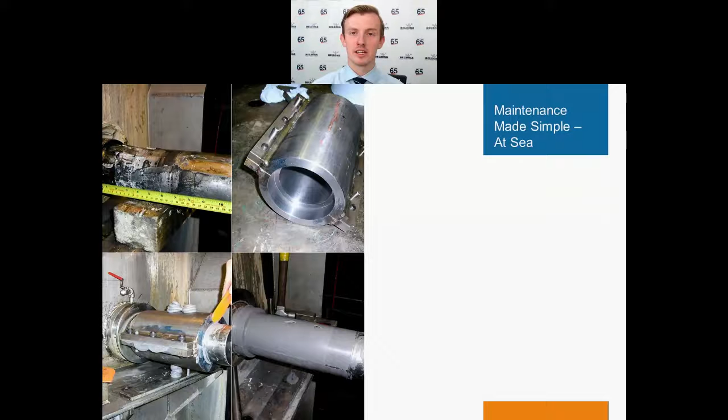One common application, as previously mentioned, is rebuilding and repairing mechanical equipment using forming techniques. Repairing worn shafts can be very tricky at sea, as it normally requires disassembly of equipment and removal of the shaft, usually for workshop repair, where you'd most often see a welding and machining back technique. The Belzona paste grade materials are 100% solids and do not change shape during curing. Therefore, they can be used to rebuild components to fine tolerances using pre-made formers. This allows for quick and easy application and can be done in situ without disassembling equipment, making this technique perfect for at-sea repairs.

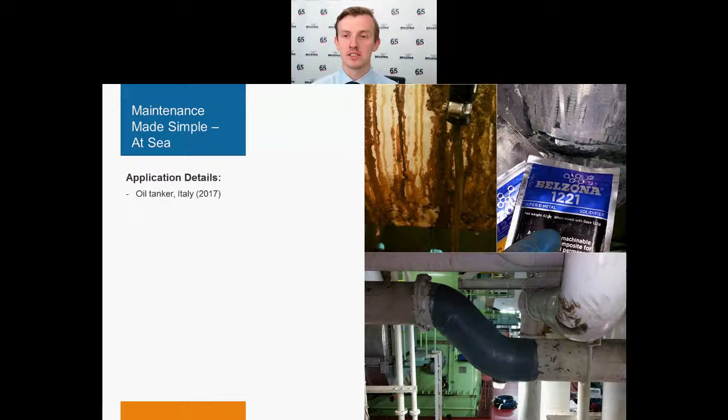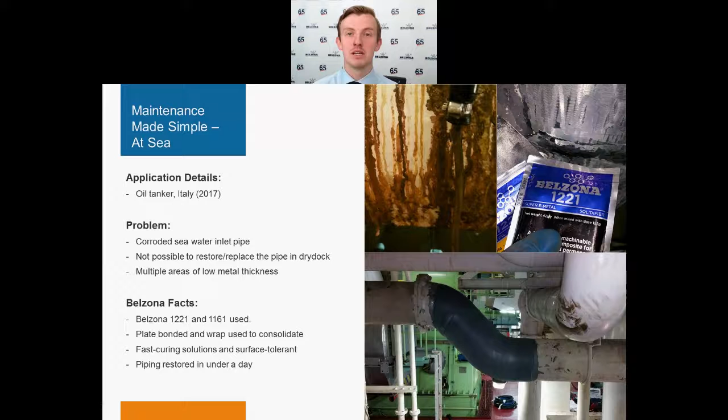Another common problem is leaking pipework, which presents unique challenges in the at-sea environment. Due to restricted space and limited availability of equipment, it's often not possible to carry out thorough surface preparation. Coupled with often wet and oily conditions, carrying out repairs can be quite difficult. In this case, the leaking pipeline was part of a cooling system, so the ship was unable to operate at full capacity until the leak was fixed. By utilising Belzona's fast-curing repair materials, the leak was arrested in less than 1 hour as a temporary measure. The repair was then overwrapped with Belzona's surface-tolerant materials, creating a strong and long-lasting repair with minimal surface preparation, directly onto a water-contaminated surface.

Touching a little further on surface tolerant materials, we're now going to show a short video of one of our emergency repair materials. As mentioned, in that case study it was Belzona 1161 in particular, but one of the most versatile materials we have available is Belzona 1212. We're going to share a short video with you now—I'm just going to stop sharing the screen and start the video. Just bear in mind it could be quite loud, so you might want to adjust your headphones accordingly for the start of that.

Belzona 1212 is the latest in rapid cure and adhesive technology for your leak repair and sealing needs. It is easy to use with a 1-to-1 volume mix ratio, and it can be applied with regular tools and minimal training. Once prepared, Belzona 1212 is incredibly surface tolerant, giving it the ability to bond with surfaces contaminated by oil or moisture. It can even be applied to underwater surfaces.

With Belzona 1212, many of our clients are quite surprised and amazed with the success when it comes to bonding our product to oily or contaminated surfaces. That, combined with the quick return to service, certainly creates some smiles on faces. Belzona 1212 maintains integrity with incredible adhesive strength.

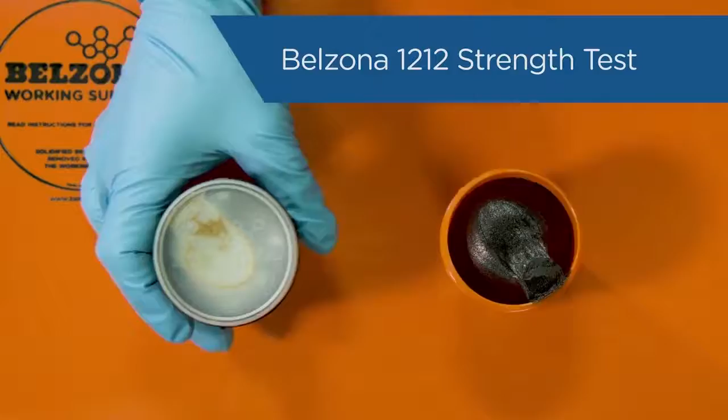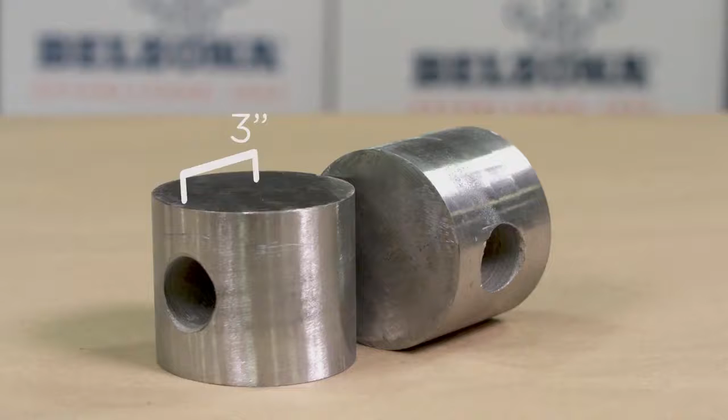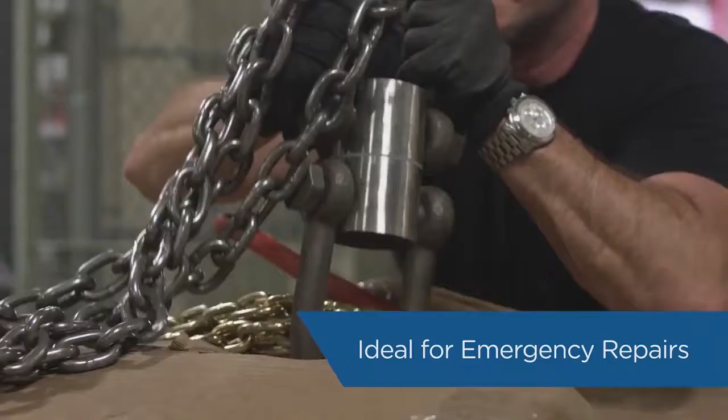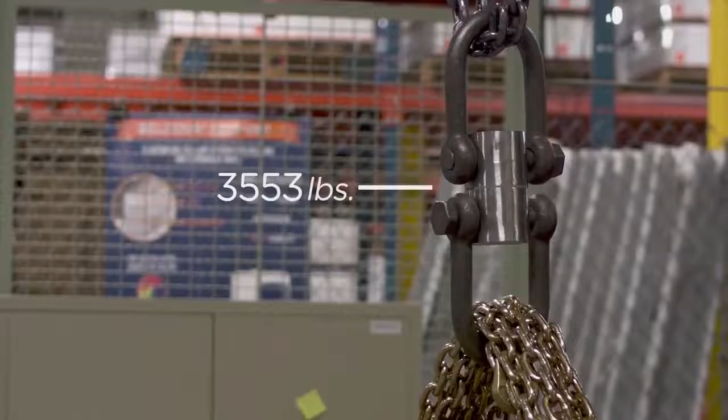Let's put it to the test with 2 tons of chain. These 3-inch steel cylinders are covered in hydraulic fluid. Belzona 1212 is directly applied, and both sides are bonded to each other. Belzona 1212 cures rapidly, capable of light loading in as little as 90 minutes, and full mechanical strength in 150 minutes. This makes it ideal for emergency repairs when you can't afford excess downtime. Will 2 tons be too much for this bond? The bond holds easily.

Belzona 1212 is a cost-effective, long-lasting solution for everything from leaking pipes and transformers to damaged ship hulls in underwater structures. With lots of great features and benefits, it benefits pretty much every industry.

Of course, some of the other products we've mentioned during the case study section also share these characteristics. 1221 has the fast curing ability, and 1161 has the surface tolerance as well. So you can be safe in the knowledge that an easy to apply, safe solution is available at your fingertips. I'll now hand you back over to Tom as we move off the ocean and then to our dry dock to look at the type of maintenance that can be required.

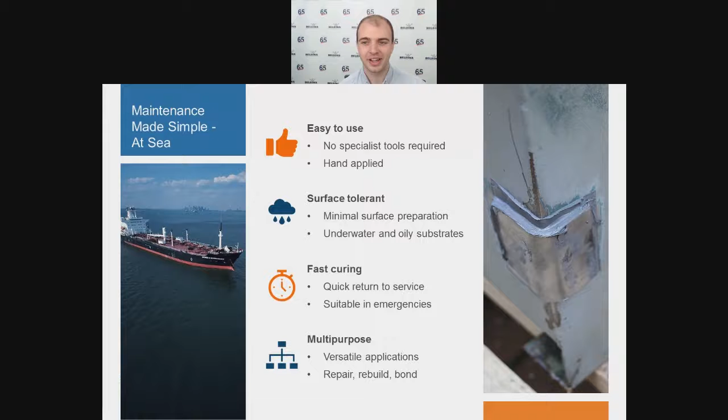As mentioned, we'll now take a step away from the at-sea maintenance and focus on Belzona's capabilities for dry dock scenarios. During these planned maintenance periods, all manner of repair and protection can be carried out, from small applications such as bonding fenders to large-scale projects on propulsion and steering equipment. Yet, the high costs associated with being in dry dock mean that there are strict schedules to adhere to, made even more important when also trying to gain approval from classification surveyors.

Belzona solutions can be applied quickly and easily, regardless of the size, helping to meet these requirements in a timely manner. Rather than covering everything that can be completed in dry dock, we're going to split this into two main sections: the first being protective coatings, specifically for cavitation and erosion resistance, followed by bonding and shimming applications.

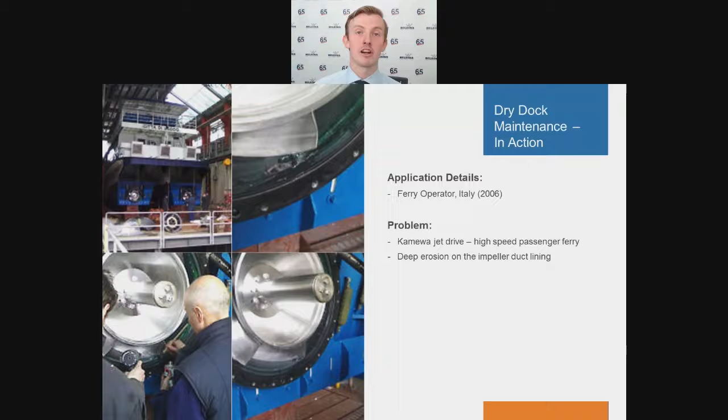The first example: this impeller duct lining had significantly deteriorated due to erosion at high flow rates. To dismantle the assembly, replace the urethane lining and reassemble was both costly and time-consuming. Repairing the urethane lining with Belzona 2311 avoided the need for dismantling of the equipment and delivered the repair at a fraction of the cost of the alternative, whilst ensuring long-lasting erosion and cavitation protection. The overall saving, considering all factors including downtime and labour, was estimated to be around €150,000 - quite a significant saving there.

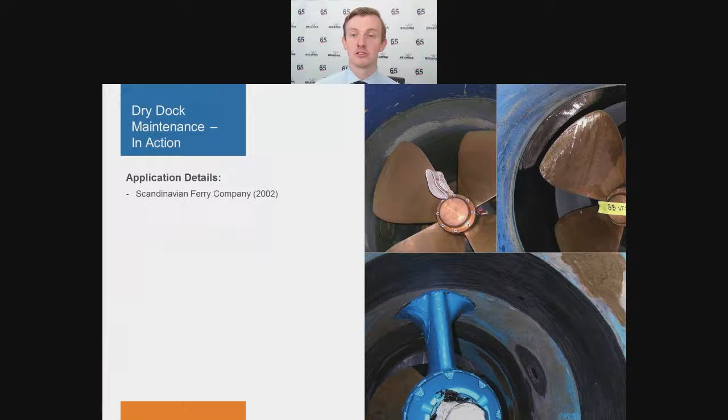In this second example, the glass flake lining on the propulsion unit had been irreparably damaged. During inspection, severe cavitation had been noted in specific areas of the bow thruster tunnels. Therefore, Belzona offered a system for not only corrosion and erosion protection, but also a specialised cavitation-resistant coating for the specific areas where cavitation had previously been identified. By doing this, it was possible to offer the optimum protective solution at the best possible cost. Nine years after the initial application, the coating is still in excellent condition.

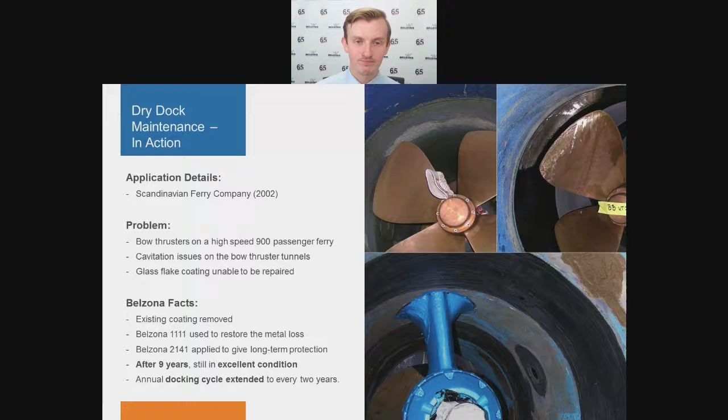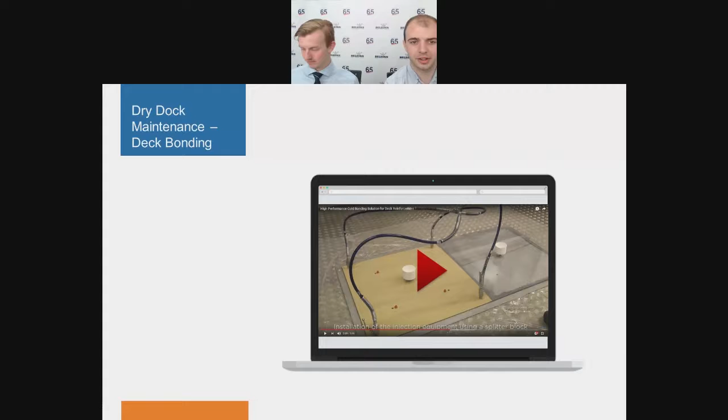Moving on from protective coatings, we'll now talk a little bit about bonding and shimming, and we'll start this off with another short video. Cheers for that, Tom. As mentioned, we're just going to share the video. I'll stop sharing the screen and we'll just commence the video.

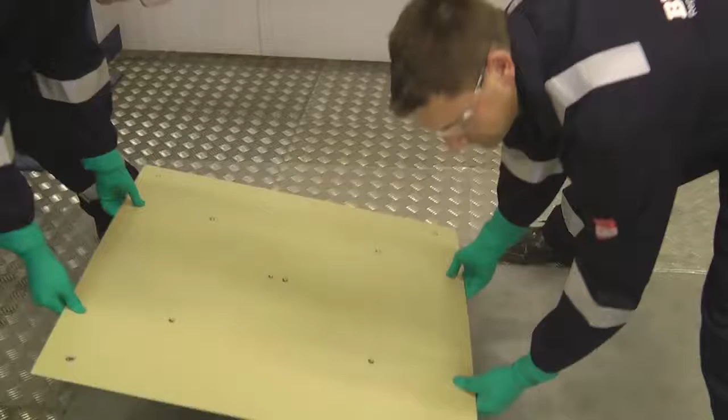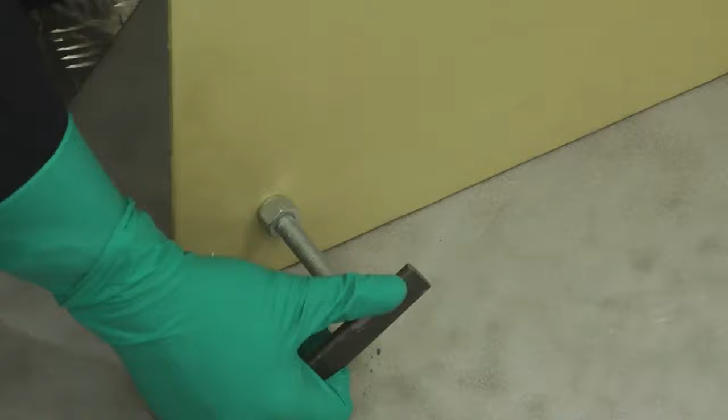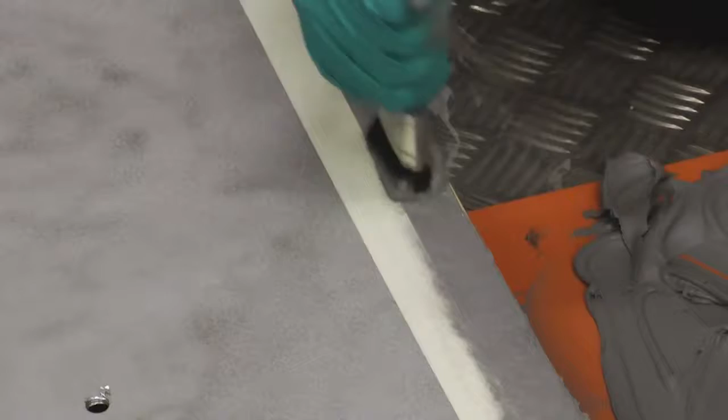This is showing the injection method for plate bonding and bonding applications. Firstly, we dry fit the doubler plates. Then jacking bolts are installed in all corners, making sure that the plate is level, basically acting as a shim. Next, we mask up the area just before mixing one of Belzona's paste grade materials, in this case 1121. As you can see, they're wetting out the edges of the plate and the deck using a scrubbing action. Next, they fill a piping bag to apply a bead of the material around the outer edge of the wetted out deck area.

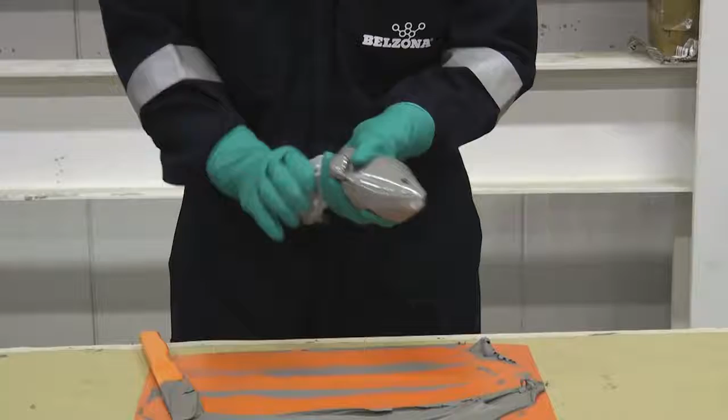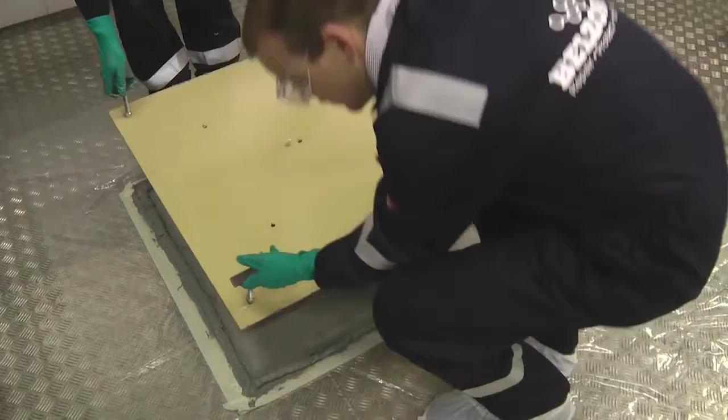This is going to create a seal around the edge of the plate. So now they lower the plate until the excess product has exuded around the full circumference, and the jacking bolts have bottomed out as well.

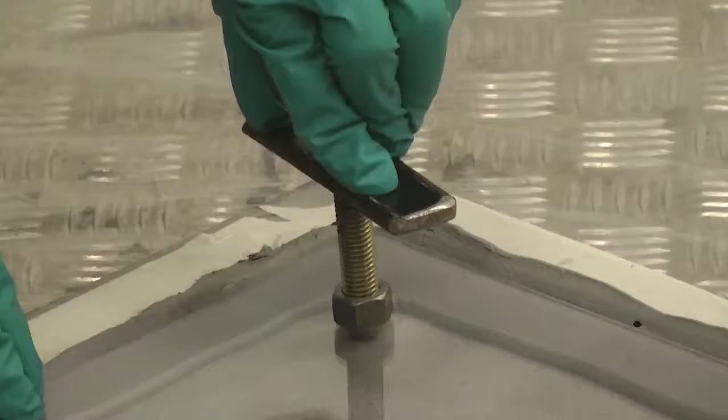You can also see in this case they're actually using a Perspex plate as an example, just to show how the injection method works. Once the seal has cured, you can install the injection equipment using a splitter block.

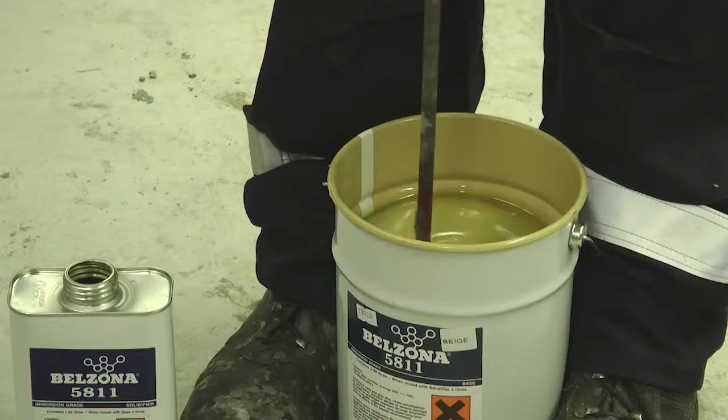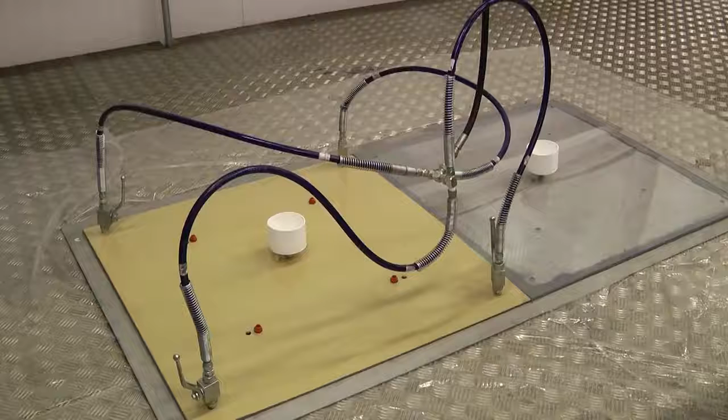Now they're going to use one of Belzona's fluid grade materials, in this case 5811, to fill the void. You can attach this to a pump and start the injection process. You'll notice that all the plates have ventilated holes, helping to avoid any air entrapment.

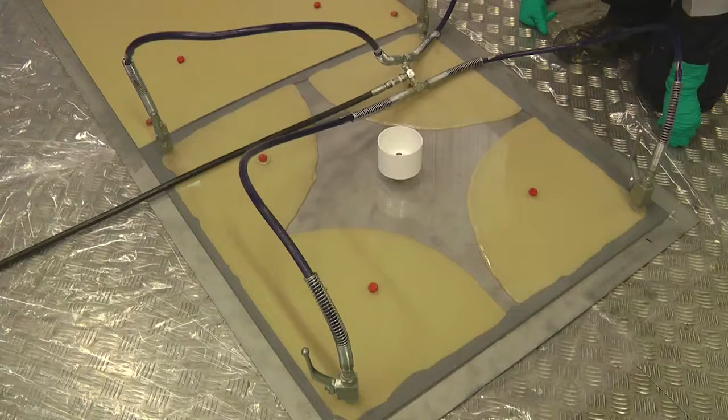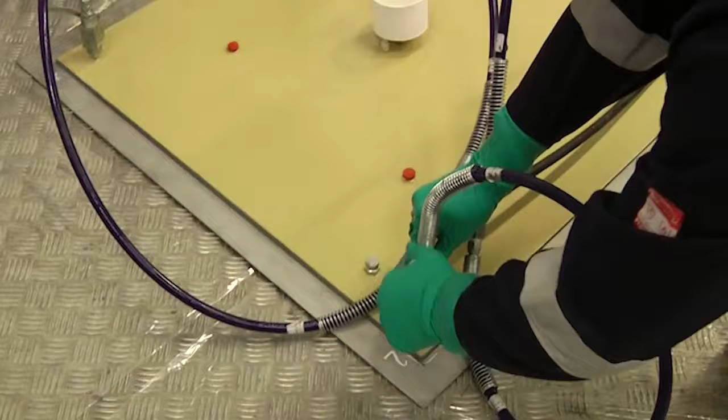Now they're capping off each inspection hole once the product is visible. You can see how it gradually fills up the voids, creating 100% contact between the two surfaces. This provides a complete bond for the deck and plate whilst protecting against corrosion. The injection vent ports are removed and you're left with a long-lasting solution for deck reinforcement.

Okay, so hopefully that video gave you an idea of how the injection bonding method works. But just to put that into a little more context, here is an application completed by Belzona's South African distributor just last year.

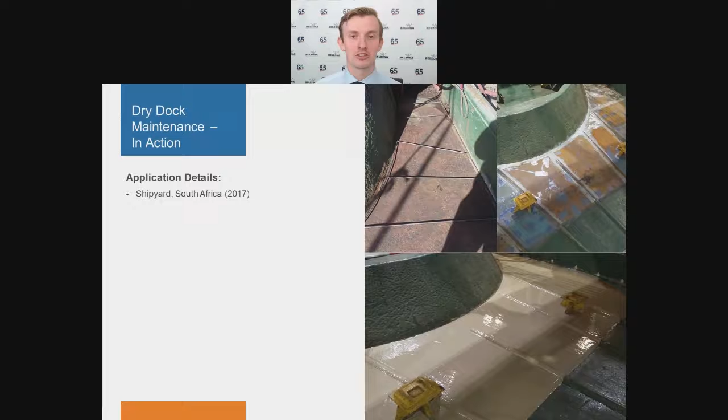So the rear section of the ship's main deck was very badly damaged by years of corrosion and wear. So a test was done to measure the metal loss. The corrosion was so severe that they initially made plans to cut out and replace the entire deck.

But in the end, this was impractical and expensive due to the danger of damaging equipment and objects installed below the deck. Instead, new deck plating could be bonded using Belzona 1111, and the cavity could be filled by injecting Belzona 1321 in between.

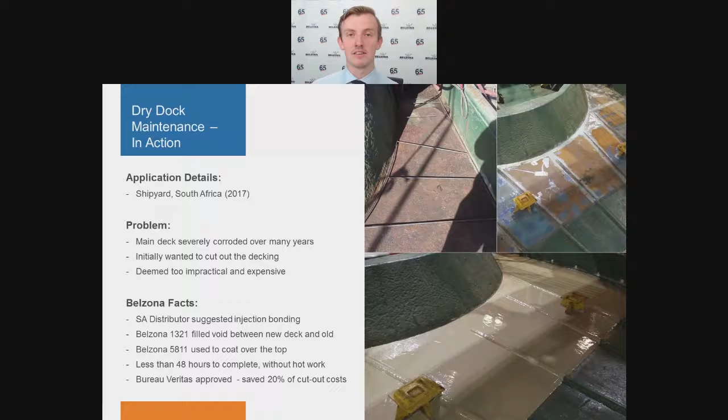This provided 100% contact across the whole area. As you can see in the pictures, this was then overcoated with Belzona 5811, an immersion-resistant coating to provide long-term protection. Not only did this satisfy the ship owner, but it was an approved repair by Bureau Veritas.

Plus, this method saved the owners at least 20% of the cost associated with cutting out the old deck and replacing it with a new one. And this method was installed in less than 48 hours, so it was also a lot more time effective than the alternative.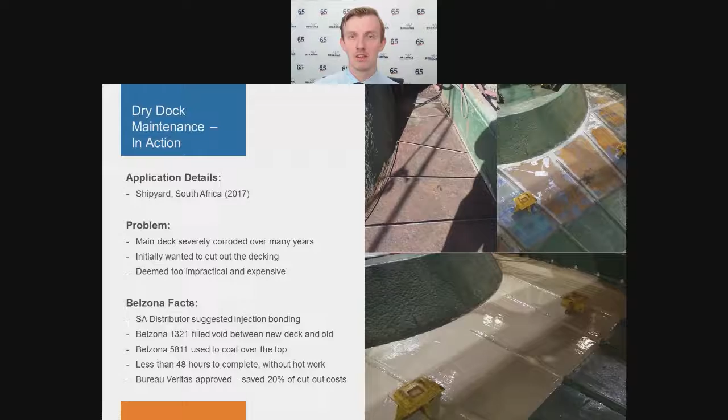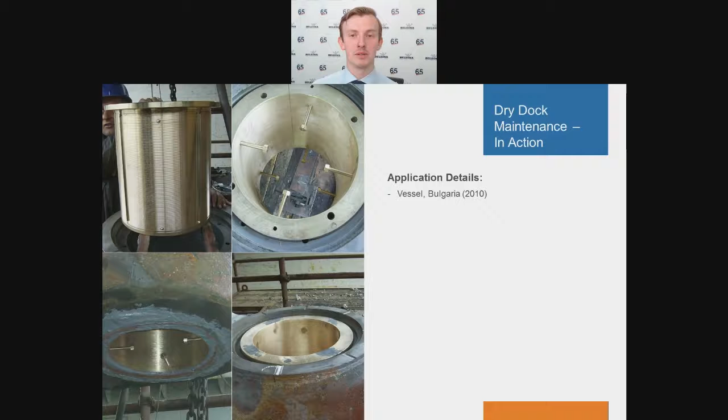However, repairing corroded deck areas is not the only use of the injection technique. Another Class Society approved method is to reseat bearings by rebuilding the corroded bearing housing. Normally, this repair would require building up of material on the bearing housing, followed by a precise machining technique, which is both time-consuming and difficult to execute.

So, by first positioning and aligning the bearing with jacking bolts and utilizing the Belzona injection method, it's possible to perfectly repair the bearing housing and reseat the bearing in a much more time-effective way. This method also ensures 100% contact between the bearing and the housing, reducing future wear, and prevents crevice corrosion.

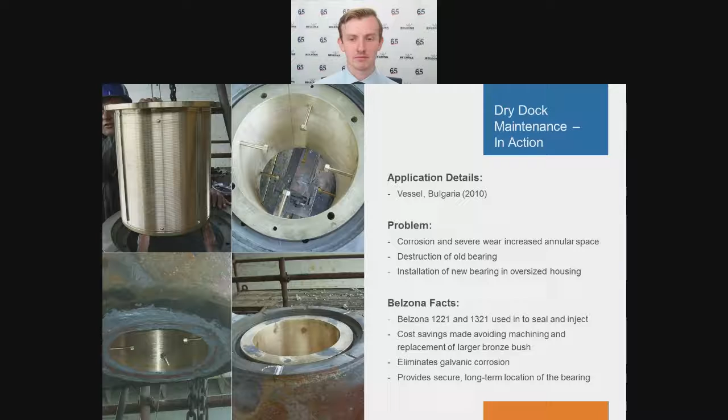So, as mentioned before with the deck bonding, Bureau Veritas worked really closely with us on that application, and as do many other classification societies across the world. In fact, Belzona has a number of approvals with these agencies as well for various products that we have in our range.

Of course, we've only covered a handful of specific applications, and you might be thinking, where else can Belzona materials be used? Or perhaps assets that I need to maintain haven't been mentioned. Fear not, as a very useful tool that Belzona has at its disposal is our Marine Solution Map. This is an interactive map that examines all the different areas we can potentially help you deliver long-term marine maintenance.

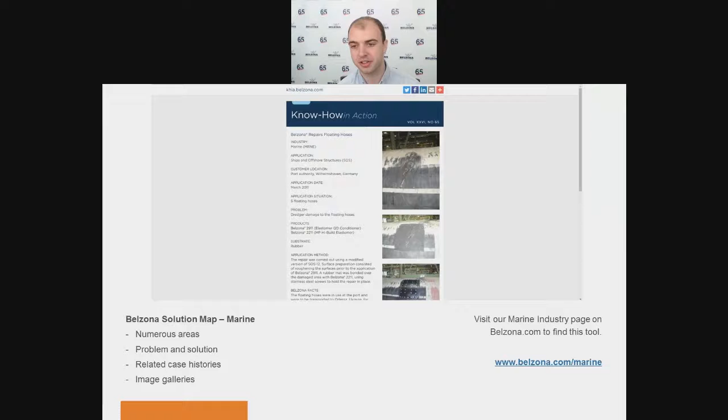So maybe you're in search of information on crane rails or floating hoses. Clicking on each area brings up key information about the problem suffered and then the appropriate Belzona solution. This is joined by a whole host of information on related products, case studies, and application images, just to prove that it's not all talk. These are application areas we are comfortable providing long-lasting results for.

Now, moving from one map to another, Belzona can provide technical support on a global scale. Alongside our head offices, we have a network of over 140 distributors in over 120 countries that offer local service and support where it is required.